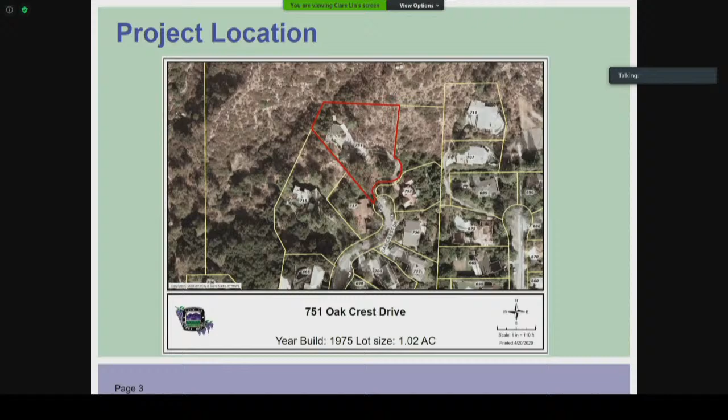Applicant has returned to address Planning Commission's concern regarding water supply sufficiency, fire flow capacity, and fire code and brush clearance requirements. We have reached out to the water department and fire department to obtain the existing conditions. The current water pressure is 85 PSI, coming from a 10,000 gallon tank above, and the fire flow capacity at the street is 230 gallons per minute. The fire marshal confirmed that the proposed

project will have to rely on the residential sprinkler system for fire suppression and a vegetation plan to either remove or maintain the existing native landscape, proposed fire-resistant species, and the under-deck sprinkler system is not a code requirement. So the property has no active records of fire code violation on brush clearance.

The second concern was the debris coming down from the hillside that impacted the garage. Commission has asked the applicant to provide remediation on the hillside stabilization, and the applicant hired a civil engineer to observe the condition and prepare a report addressing the localized slope instability of the existing relatively steep slope. The report recommended removing the soil debris adjacent to the rear portion of the garage and constructing a debris wall of at least 24 inches above the existing retaining wall, and also constructing an erosion control device on the surface of the distressed area.

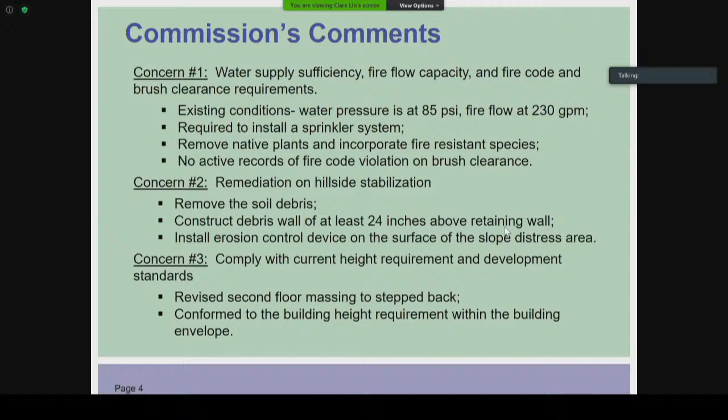So the proposed project is a repurpose of the lower floor and the foundation, and demolish the exterior walls and roof for the first and second floor, revising the second floor and adding 598 square feet.

Also, reconfigure the guest house to accommodate the 2-car garage. The primary residence is 4,025 square feet with the new proposed garage of 577 square feet. The converted guest house will add 267 square feet to become a new ADU.

The proposed project will remain designed in contemporary architectural style, using stucco walls, horizontal wood siding and wood decking, recessed aluminum clad single pane windows, earth tone colors, and it will comply with the low impact development plan.

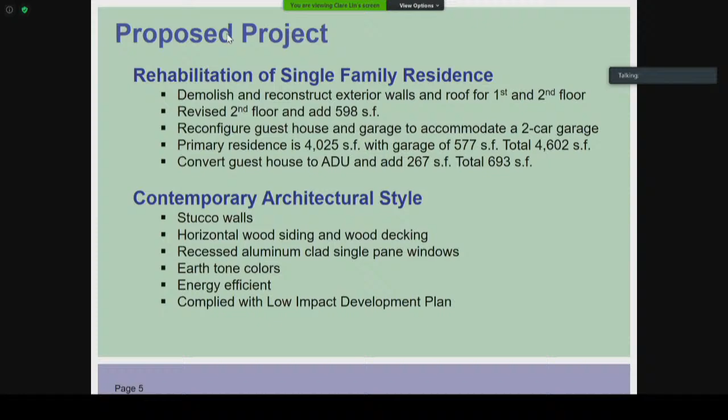The applicant prepared a neighborhood analysis conducted on 35 properties within the 500-foot radius, excluding vacant lots. The analysis indicated that the proposed 4,025 square foot residence is 484 square feet greater than the average top 1/3 of the neighboring homes.

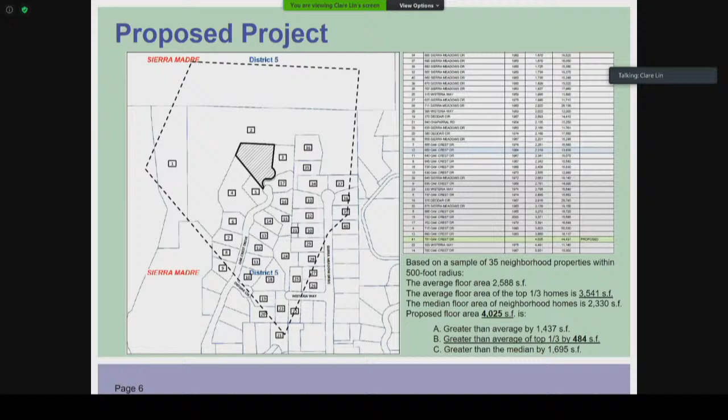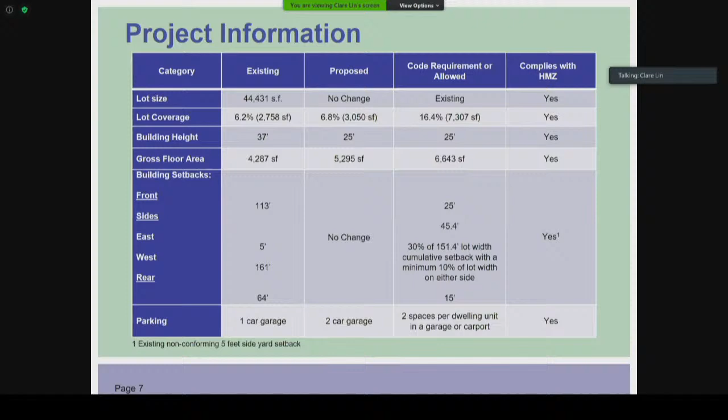Here's the project information. The project meets the requirements on lot coverage, gross floor area, building height, setbacks, and parking requirements.

Here's the site plan, showing the already graded area and the location of the proposed project. It will rehabilitate the 2 structures on site, leaving the remaining property undeveloped.

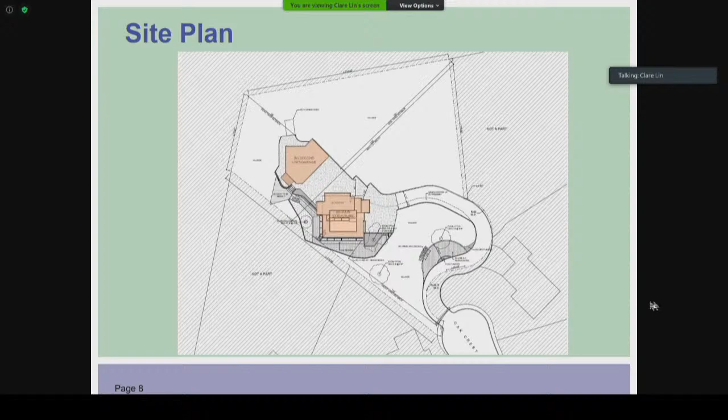The applicant has also prepared a landscape plan, showing the fire department requirement of a defensible space around the building. Existing vegetation or other combustible fuel type vegetation will be cleared and replaced with fire retardant species.

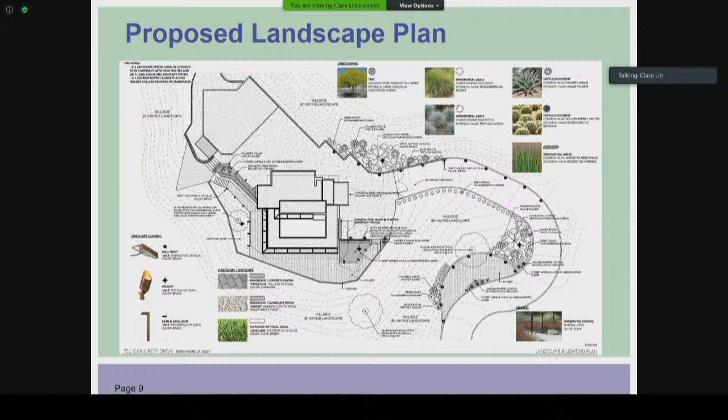And the guest house will be expanding by 267 square feet, removing the outdoor spa and the existing patio.

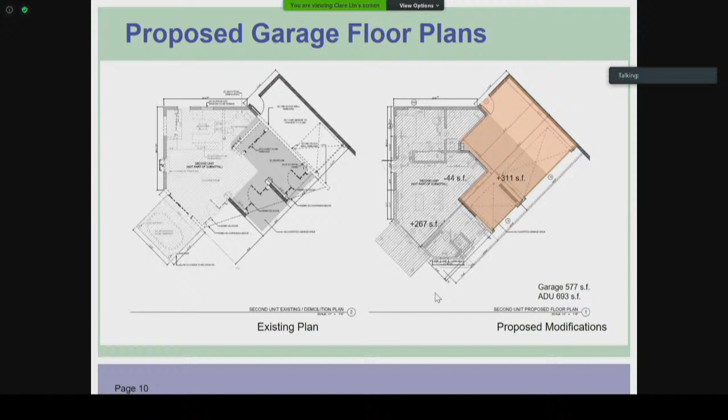Here is the elevation of the garage and the ADU attached to it.

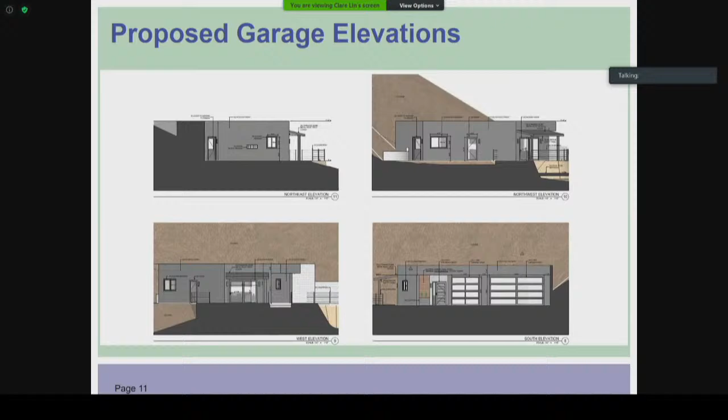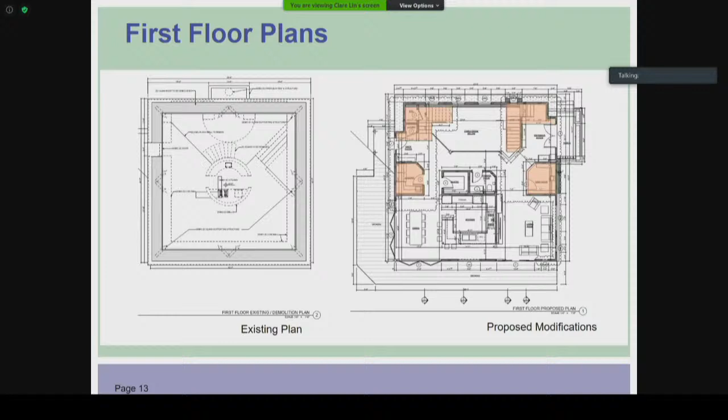This is the first floor plan, and it also remained unchanged. The only alteration from the last meeting was a new laundry room and a wine room, and an alteration of the staircase.

The proposed second floor plans show the existing floor plan and the proposed floor plan. It has been reconfigured to accommodate a master suite, which includes a bedroom, bathroom, closet, and open deck with a new vertical staircase. The massing has been pushed towards the hillside, adding 598 square feet.

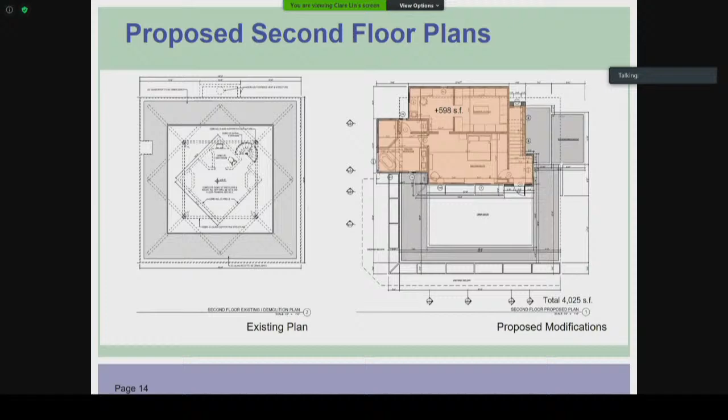Here are the sections: an east-west section that cuts through from the entrance, and a north-south section that shows the profile. The second floor volume has been shifted towards the hillside.

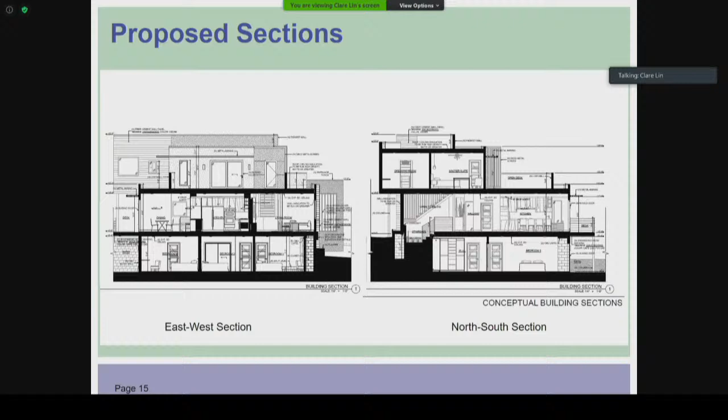Here is the northwest elevation and the northeast elevation.

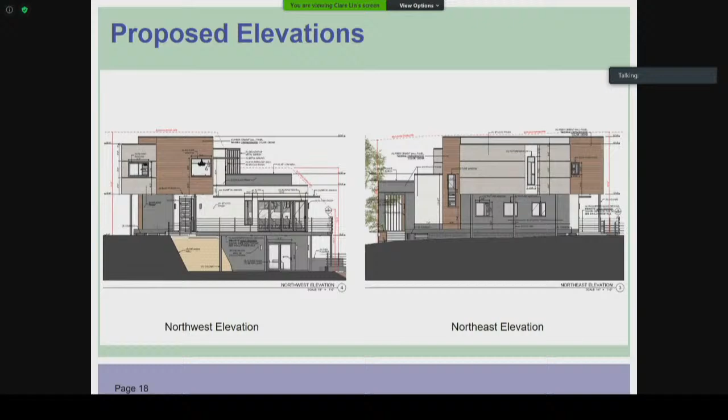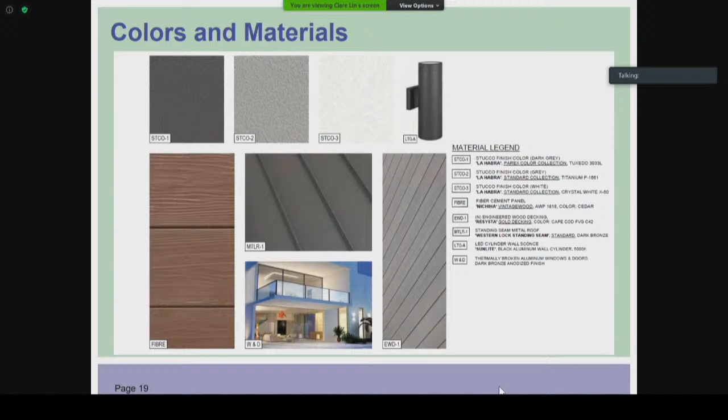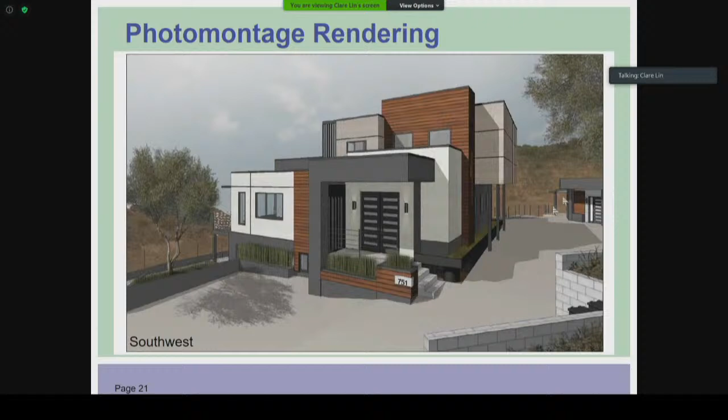Here's the view of the southwest corner. You can see the deck and also the guest house in the back.

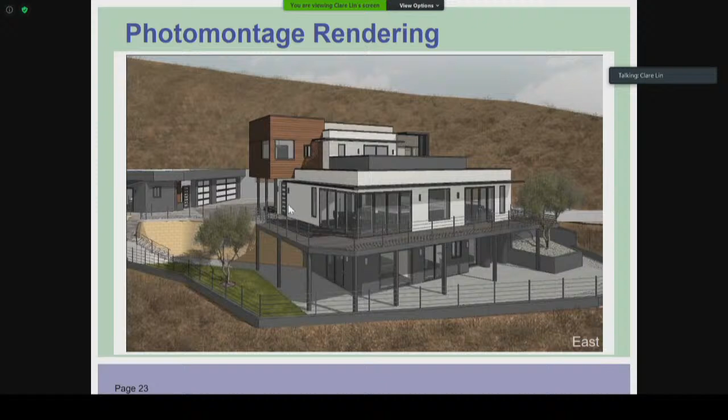So the Hillside Development Permit finding has to be made in order to approve the project. Here are the summary of the findings.

The proposed project is consistent with the general plan goals and policies for Hillside development by continuing the residential use of the existing pattern. The proposed development meets all the standards.

Development has minimized natural hazard and maximized access to open space, as it is developed within the existing footprint, and the remaining site will remain undeveloped.

The proposed project eliminates environmental impact and complies with design and development standards, as it is an adaptive reuse of the existing foundation, and it will not alter the existing topography or grading.

The alternatives before the Planning Commission this evening are to approve the application with modification, deny the application by identifying the findings that the commission feels cannot be made and the basis for rejecting those findings, or continue the application and provide staff and applicant with direction. Staff is recommending that the Planning Commission approve the application for Hillside Development Permit 2001 pursuant to Resolution 2008.

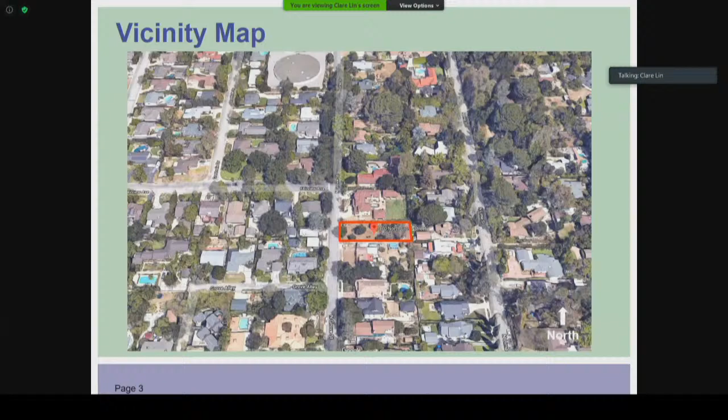Project summary: the proposed project meets the requirements on lot coverage, gross floor area, building setbacks, and parking. Except for the building height, the applicant is seeking the Commission's review on the proposed architectural feature to exceed the building height and encroach into the angle plane.

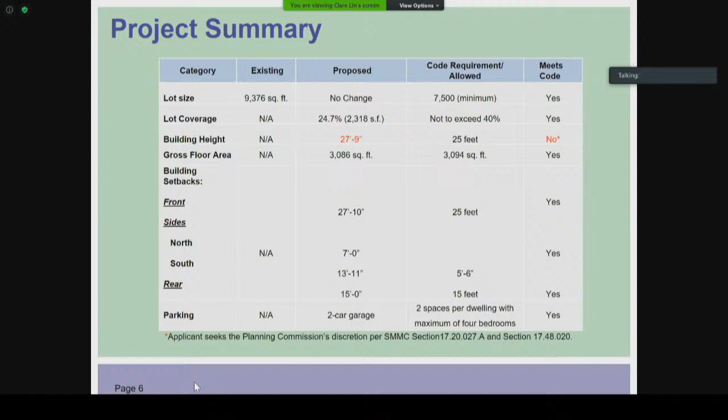Here is a survey map of the vacant lot. According to the Arborist Report, there are 10 protected trees on site occupying the lot, including coast live oak trees and a California sycamore tree.

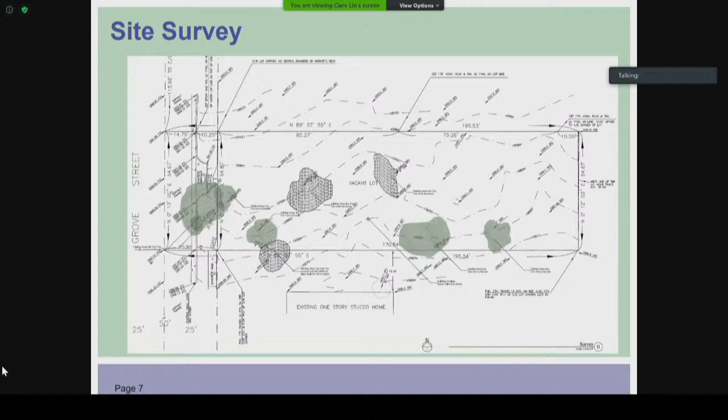The 3 canopies with hatch in dash line are the ones to be removed. An Arborist report was prepared in 2009. Public Works has reviewed the report and approved the removal of the 3 oak trees with mitigation, and the remaining protected trees will follow the recommended measures from the Arborist report to install protective fencing at the drip line during construction, and there shall be no grading within the drip line.

Here is a conceptual landscape plan. The dark brown area shows the mulch area, and the rest of the vegetation incorporates drought-tolerant plant species. The lower plan shows that it is divided into different hydrozones to comply with the water efficient landscape ordinance.

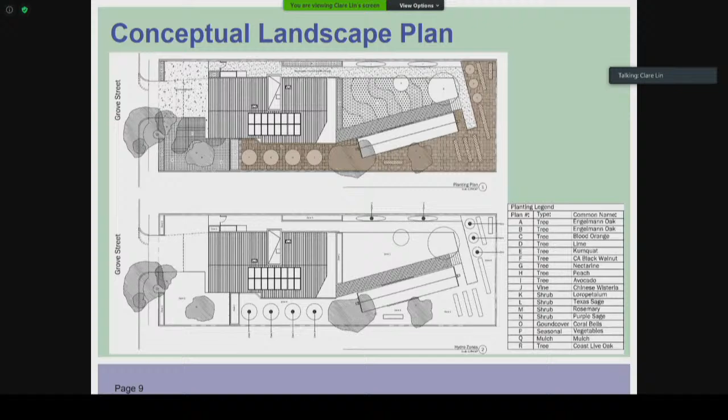The proposed grading and low impact development plan will utilize best management practices and propose several locations of stormwater retention planters, outlined here in blue.

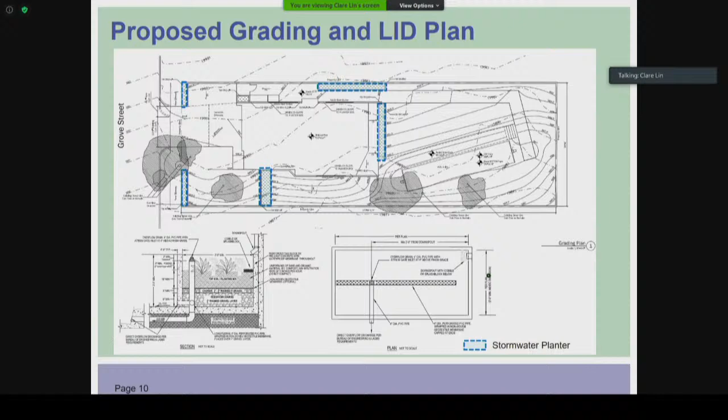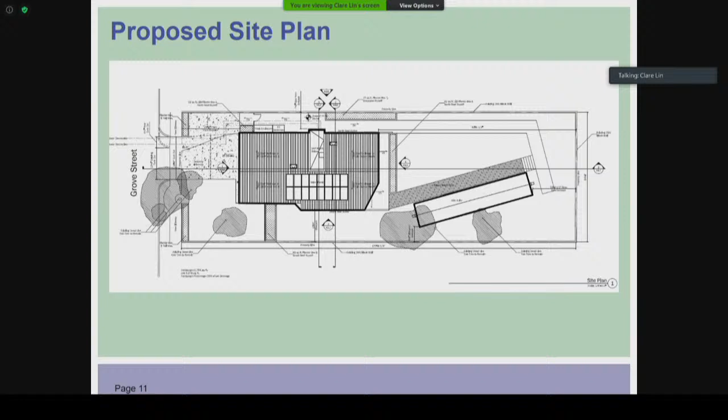Here is the site plan showing the rectangular footprint of the 2-story project and an ADU placed at an angle in the rear. The front yard setback is 27 feet 10 inches. Side yard setback to the north is 7 feet, and the side yard to the south is 13 feet 11 inches from the south property line. The rear yard setback is 15 feet.

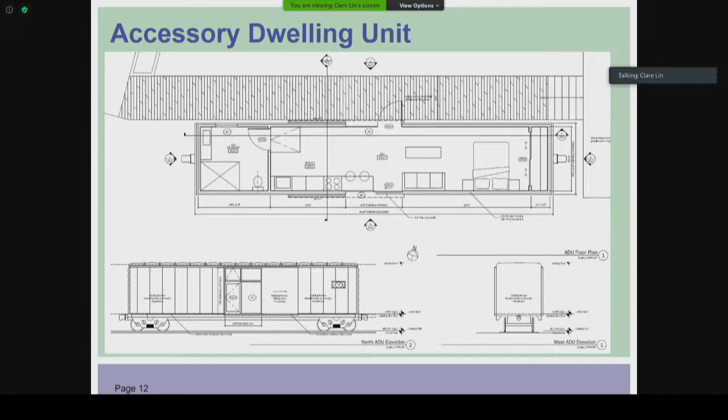Here is the plan and elevation of the proposed ADU. That is a reclaimed boxcar anchored to the track. It was intended to reduce the impact to the protected trees, and it will be connected by a raised deck walkway to the main structure.

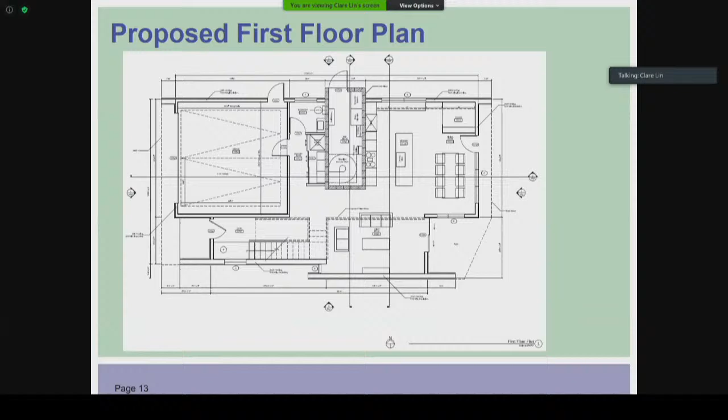The proposed first floor plan includes a living room, dining room, kitchen, powder room, laundry, and a mechanical room with a play slide or laundry chute, with an attached 2-car garage. The stairs lead to the second floor, which includes 3 bedrooms, 2 baths, and storage.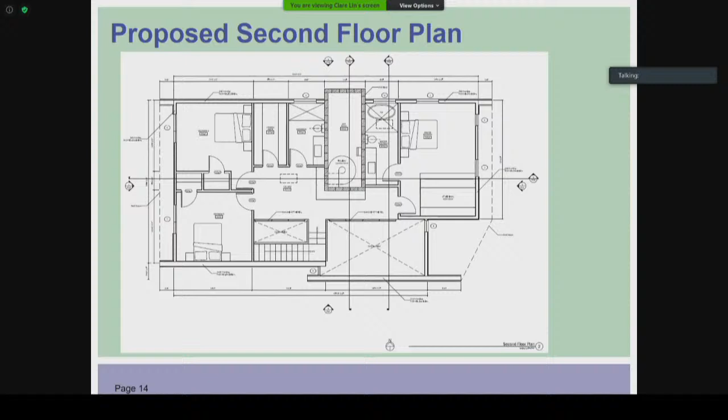Here is the floor plan showing the standing seam metal roof that continues from the exterior wall to the roof. The proposed location of the solar panel is required by law, and the location of the mechanical room, which is 7 feet 4 inches by 18 feet, protrudes beyond the roof that bisects the building.

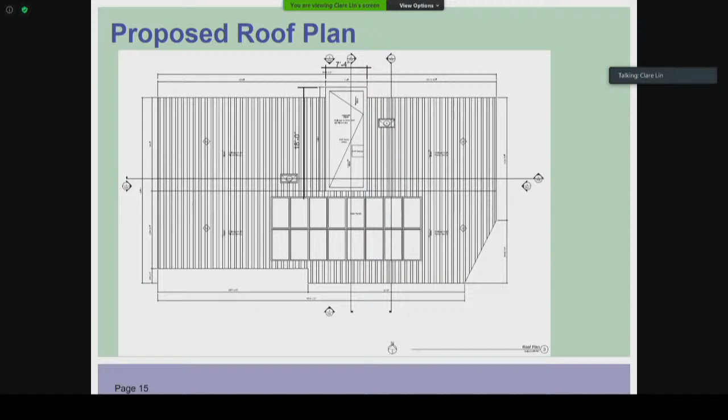Here is the elevation of the proposed project. It is a 2-story modern barn designed in a modern architectural style. The street-facing elevation includes the attached 2-car garage, and the vehicular access faces Grove Street. The proposed project is in the form of a gable house that has an efficient layout with 2 floors centralized around the 2-story utility room.

This feature exceeds the height standard where it penetrates through the roof and encroaches into the angle plane, shown here at the triangle. Staff expressed concerns with the mechanical structure exceeding the height standard and also encroaching into the angle plane.

The metal garage door is also a prominent feature of the front facade. Given that this is new construction on the vacant lot, staff feels there would be other opportunities to place the garage behind the primary structure or offset in the plane from the street-facing elevation.

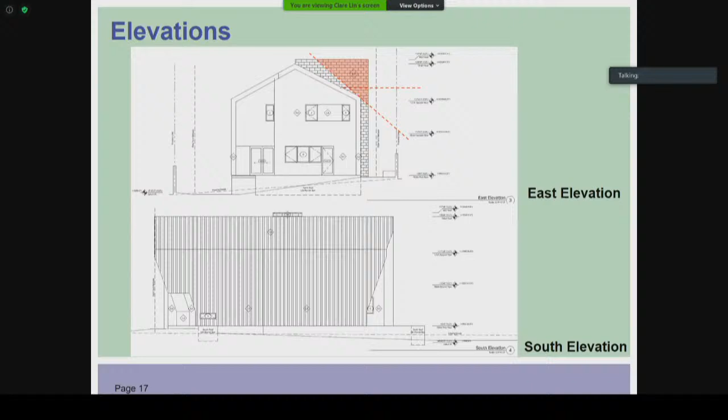Here are the sections showing the program is centralized around the utility shaft with a play slide or laundry chute that accesses both floors.

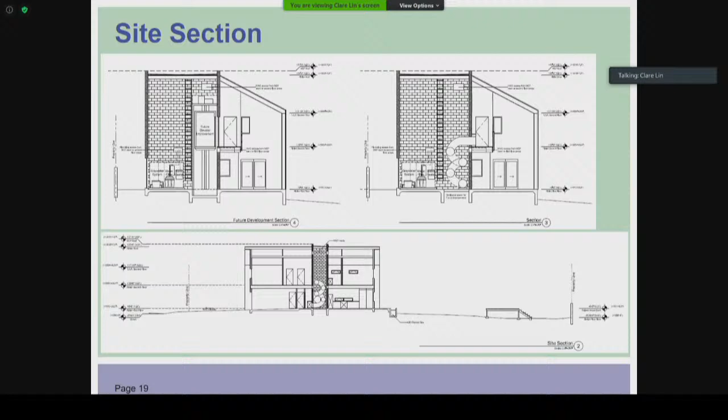Here are the sections showing an option. In the future, it might be able to accommodate an elevator. The overall section shows the grade elevation on the side from the street to the rear line, and it's roughly 2.5 feet to 3 feet 10 inches from the west to the east.

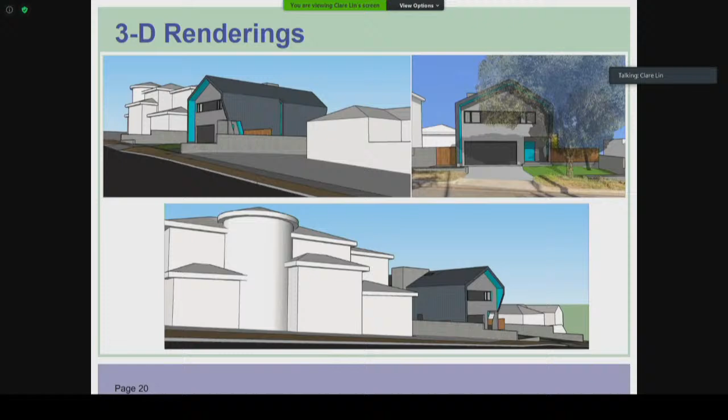Here are the renderings of the overall massing from Grove Street. One is looking northward and the bottom one is looking southward on the street.

Here are the materials that we'll be using for the proposed project: standing seam metal roof, CMU block, sheet metal siding, and smooth finish stucco wall, all in combination with glass, which is a metal clad window with bronze anodized finish frame.

The color palette is primarily gray with an accent color front door. I also included a play slide in the picture of what it might look like.

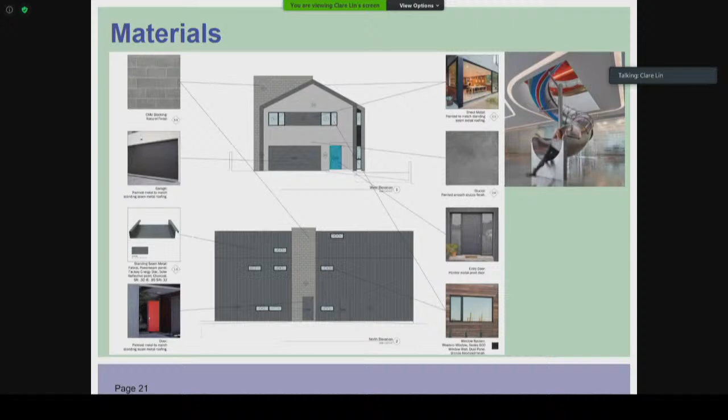Here is the material that will be used to place the ADU on site. We will be using steel railroad ties installed on grade for the ADU, and the ADU could be welded or mounted to the foundation.

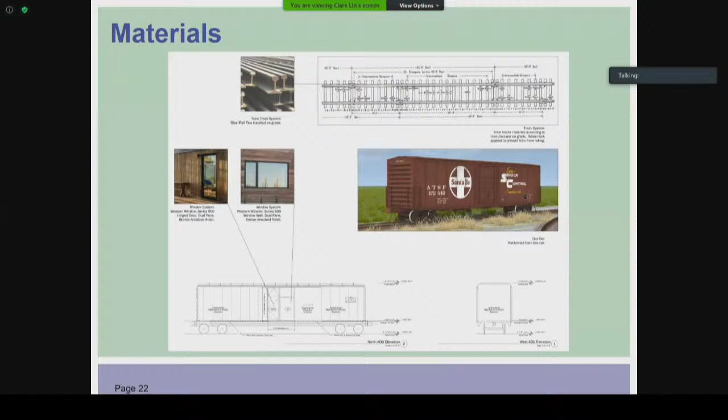A design review finding has to be made in order to approve the project. Here is the summary: the project is an infill development as a single family residence, and it is consistent with the low density general plan designation and zoning code. The project complies with setback, lot coverage, and floor area requirements, and it is seeking relief on the maximum allowable height and encroaching into the angle plane.

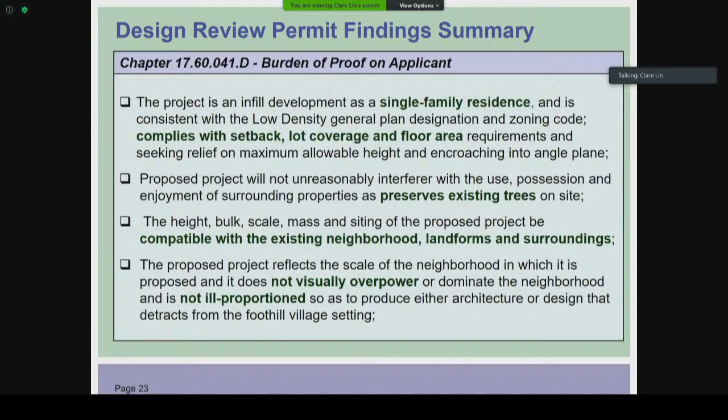The proposed project will not unreasonably interfere with the use, possession, and enjoyment of surrounding properties, as it preserves most of the existing trees on site along the south property. The height, bulk, and scale are compatible with the existing neighborhood landform and surroundings. The project reflects the scale of the neighborhood, is not visually overpowering or dominating, and is not ill proportioned.

The project will not unreasonably interfere with public view or the view and privacy of neighbors, or detract from the village setting. The project has minimum window openings on the north and south elevations to address that. The project exhibits coherent project-wide design, constructed with high quality materials: standing seam metal roof, smooth finished stucco, CMU block, and sheet metal applied on all elevations, regardless of whether they are seen or publicly visible.

The project is seeking relief from development standards for additional height and encroachment into the angle plane, where staff cannot make a finding. Lastly, the proposed project of 2,613 square feet is below the size threshold and is not subject to finding number 8, whereas the ADU shall receive ministerial approval.

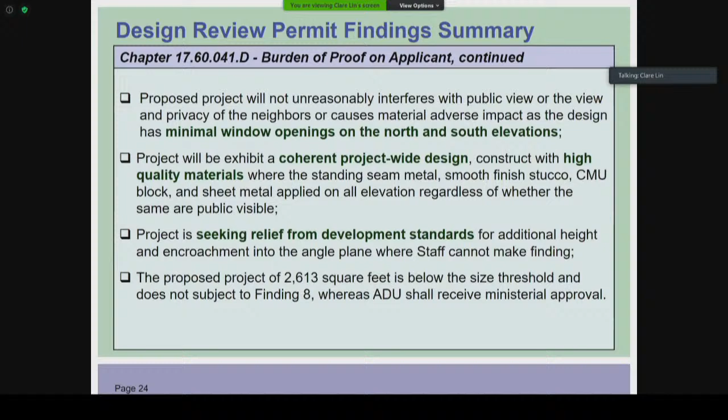The alternatives before the Planning Commission this evening are: to approve the request for design review permit 2002 and direct staff to prepare a resolution; to approve with modification or deny the request, citing the reason and finding for denial; or to continue the project and provide direction to the applicant and staff.

Staff is recommending that the Planning Commission take the following action: continue the application for design review permit 2002.

That concludes my presentation, and our applicant has a brief presentation as well.

Mr. Kuroda, you can share your screen, or you can just address the commission. Does that work for everyone? Is it visible? Yes, okay, so I just wanted to do a quick presentation to address some of the concerns the planner had, and also to show some of the reasoning for our design.

By the way, my name is Michael Kuroda. I'm the designer and also the homeowner, so it's a design-build project.

This is the first floor plan, and in blue you have the MEP room, which is the room that's kind of in question right now. Adjacent to it are the spaces that utilize all the utilities within this space. We have a gray water system, a water filtration system, a tankless water heater, a wall battery, and the HVAC will also be within this area.

This really helps with our efficiency, running plumbing, and giving us access to it. Within the MEP corridor, our plumbing will be visible along the wall, so we're able to improve anything we need or do any kind of repairs, like improving the gray water system. We could easily bring in new technologies and improve it without having to do any destruction or improvements to the house. It's all contained within this one area.

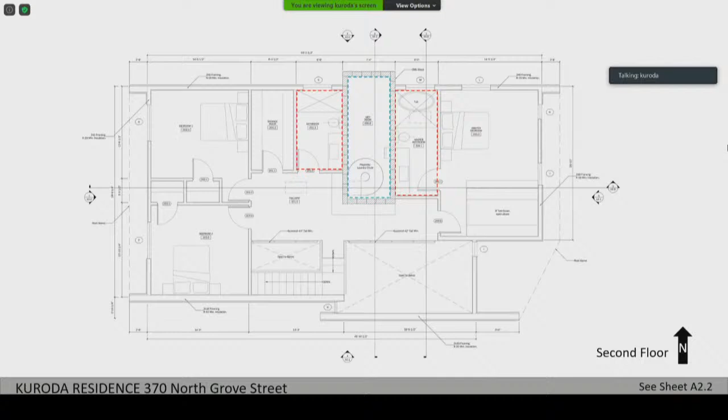On the second floor, you can see that we'll also be recycling water from the showers and the washer, which will be part of the gray water system. This section helps show how the corridor works.

The blue arrows are the HVAC. On the first floor, there's not too much space—it's just the kitchen and living room—so we don't need to spread these ducts too far, which allows us to have lower ceiling framing.

On the top, second floor, the HVAC goes through almost like a really small attic space, as you can see in the next section, but it's able to reach the farther ends of the house, which are the bedrooms. The red arrows show the plumbing that would be accessed through the MEP corridor to the bathrooms and kitchen.

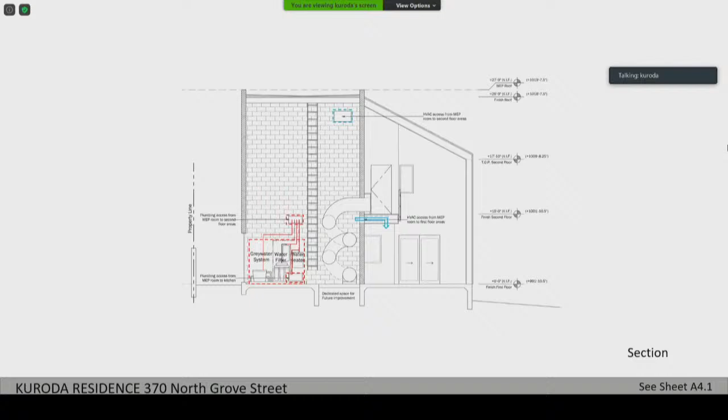In this section, you can see, once again in blue, the HVAC access to the second floor on top, and in the middle, quick HVAC access to the living room. In red, you also have the plumbing with access in the middle to the second floor, and on the lower end to the kitchen.

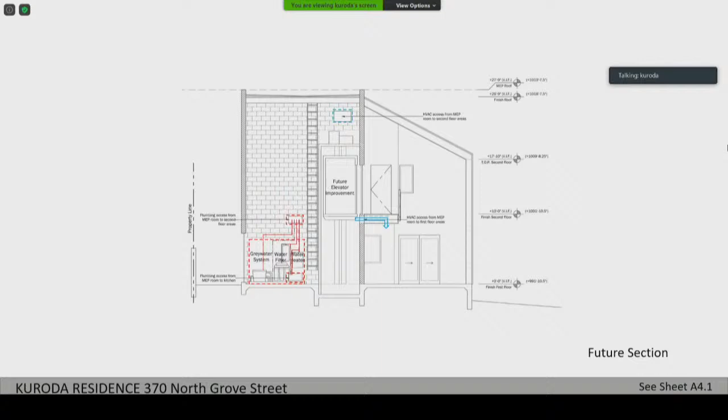Under the slide and laundry chute, you can see that the foundation is lower, and that's for our future development. We're considering doing an elevator in the future. A couple years back, my mother had a stroke, and before that she was able to walk with a cane, but within the last year she's been bound to a wheelchair. So it's something we have in mind for the future, that hopefully things get better, but we want to be able to plan for the future. This is something we can do without major renovations to the house. It's already fully encased, and all we'd have to do is remove the laundry chute, and we'd still have the existing openings we could utilize for this.

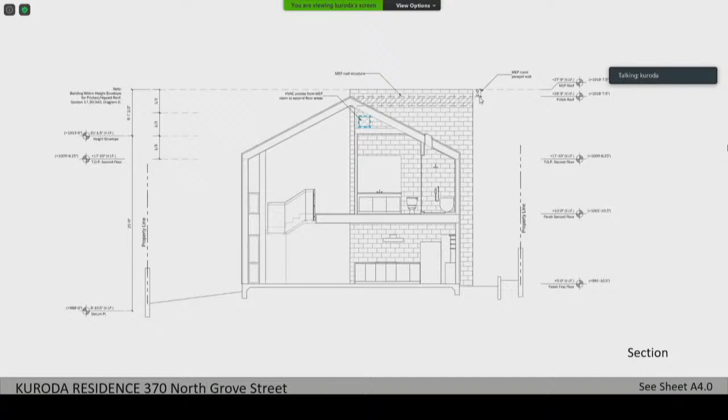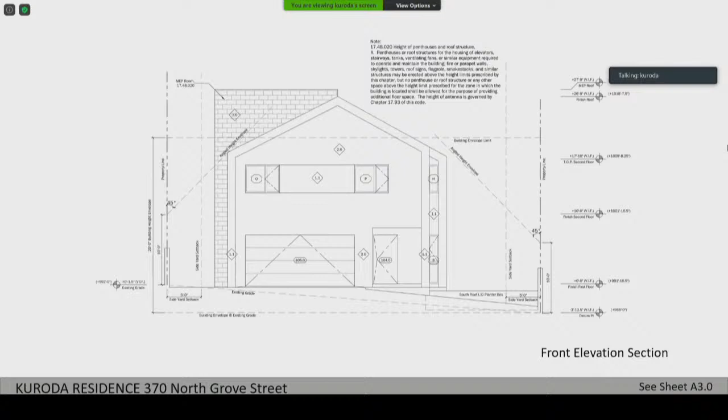Here we have the code, which I'm not going to read verbatim, but it basically says we're allowed to have a space that goes over the roof limit to house things such as an elevator, tanks, ventilation fans, and other equipment, as well as a parapet wall to help maintain the building. I believe the MEP room qualifies for all of that.

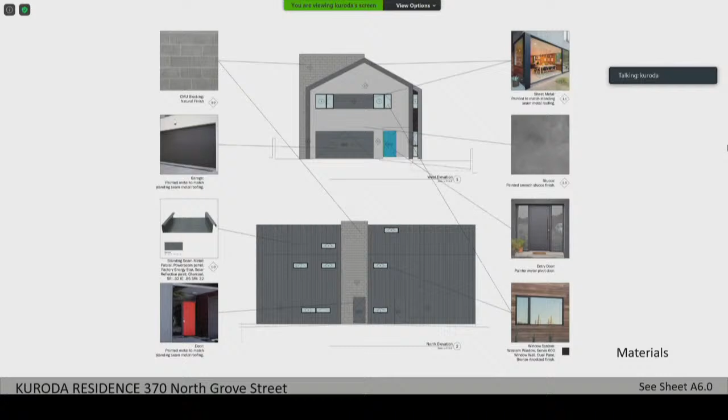As far as the material board, one of the main features we have is the standing seam steel roof. Here on the 1.0 you can see that it's factory rated to be energy efficient, and it has an applied paint by the factory that has a solar reflectivity to it. So it's part of the ways we're trying to be more efficient with our design.

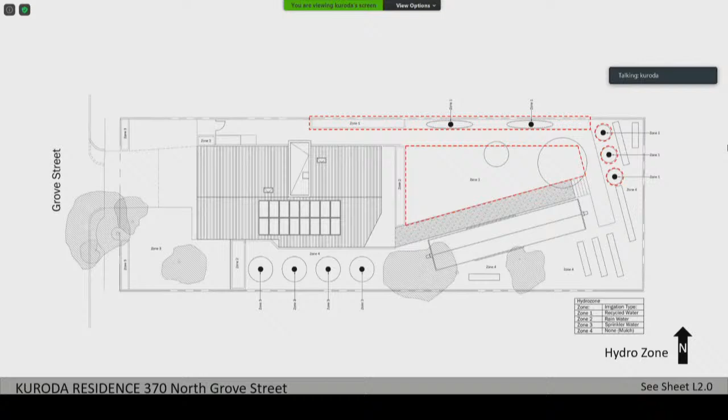Part of this design being efficient, we're trying to do LEED certification, so you can see on attachment F more information about that. But as you can see right now, we're at 85.5, which is a gold rating, and we're actually only 4.5 points away from getting a platinum certification if we were to go with this design. Just to let you know, we didn't completely fill out all of this checklist; there are some areas we still have to finish. One of them is Title 24, which is basically the percentage that you design your house above the minimum requirements of Title 24, and the maximum points are 19 for that section. So we're very close, and I think we could easily get to this platinum level of certification.

And then the other thing I wanted to address was the garage, the prominence of the garage.

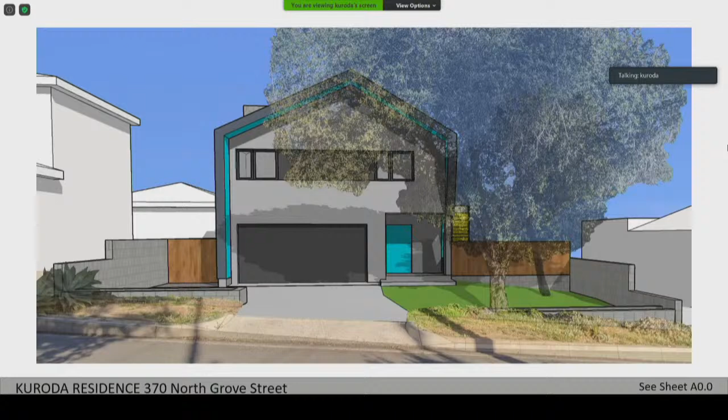So this is a rendering we have that doesn't quite show exactly how it would be, because I was trying to show some of the house in the back. But as you can see from the front view, there's a lot of large trees that would really block the front view of our house.

So I don't think the garage would be a big issue as an eyesore. This one tree in the front is actually on city property, so we'd obviously keep that, but we also want to keep the trees on our property. Right behind the fence there's another oak tree that we're also keeping.

And then just as a last slide for the survey, we wanted to show there's really not a lot of space to move the garage to another location like the back. If we're to keep all the oak trees, they need a certain setback so we don't destroy them. With a 10-foot driveway and everything, our house would be reduced to about 20 feet wide, which isn't really reasonable, and we'd have to completely change the design because it's not a cookie cutter house. We can't just move the garage to the back.

Also, if you look at the site plan as designed, we have about 23% hardscape on this design. If we were to have a garage in the rear with the driveway and everything, we'd be closer to over 50% hardscape, which I don't think is something the city wants. It's just going to create more runoff and less water being absorbed into the natural landscape.

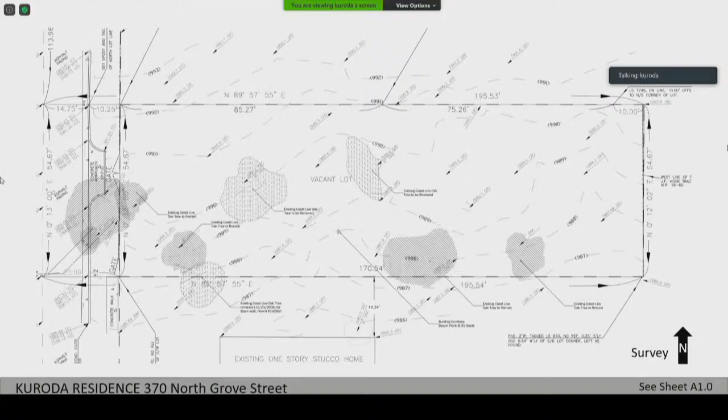And so that's it, and I'd be happy to answer any other questions you might have.

I've got a question for the applicant. You showed a slide, a section through your MEP core, and you showed all the functionality in the core. Above all the systems that you have, what is that volume? Why is that volume needed inside the core above the gray water? It seems like it's just empty airspace that you're capturing.

Well, one, we want to run the HVAC system up there, but it's also, I mean, it's a CMU block, so it's not like we could have it at an angle. It's a block wall. Why do you need it that tall? There's no function there.

Right, but we wanted to try and make this an homage to making it look more like a traditional house with a remnant of a chimney structure. It also continues the structure from the gable roof across, so then we don't have lateral movement structurally. So you're concerned about lateral movement? Just within the MEP area, yes. We want to have that continuous roof.